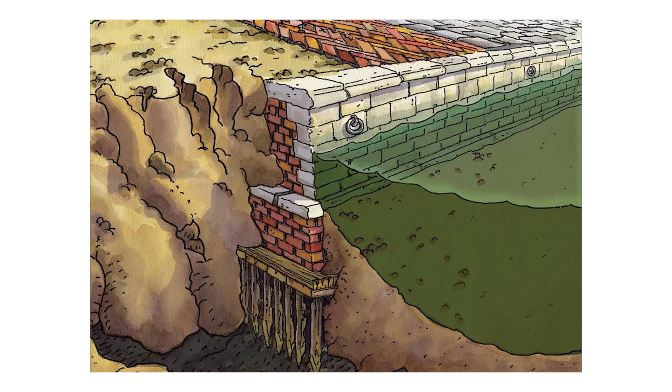How? Simply like that. Piling down piles, creating a sort of dike, and from the dike you will fill it with earth, coming from where you wish—coming from sites where old buildings were demolished, with the rubble filling it up—or earth coming out from the excavation of canals, which was very important in Venice in order to provide good movement of the tidal waters and to make easy the naval and boat circulation in the city.

So this is what you have as a boundary between land and water. And it's very important to have this in order not to allow squatters to illegally occupy the sea, the lagoon water, which was a common property. It belonged to the Republic, to everybody, to all of us.

So it was forbidden. And you know, if you have a working site on the lagoon, here for instance, it would be very easy, every one day or two, to put some mud in it, and slowly expand, looking around if they catch you or not. The laws were very severe: cutting your hands, paying 100 ducats, going to row in the Navy, and things like that. So the temptation was continuous.

But with this line here, which is an embankment, you can see also how much work is required to build the city of Venice. It's not simply that you shovel some earth on the water and that's it. You have to create a precise boundary, solid and strong. And this is the boundary that you see.

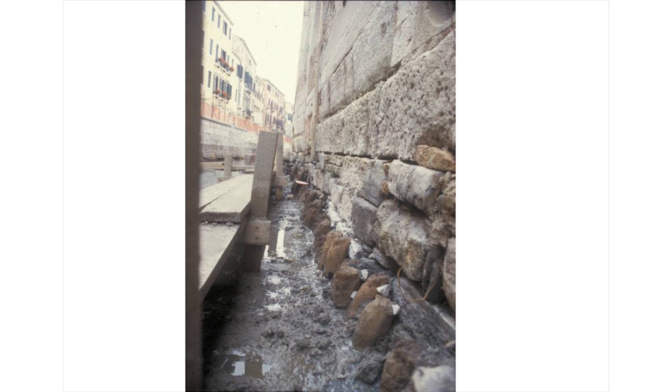Now, if you follow me, it's not a perfect picture, but you can see that this canal in the so-called parallel islands of Venice, in the Cannaregio district, northwest district, going to the railway station today, this canal has been dried up. You have to do it from the very beginning at least once every 10 years, because all the dirt of the city, toilets, dirt, and other things go into the canal. They start filling it, so that the naval circulation will not work properly, and the tidal effect, the cleaning of the city will not work. So in this case, you have to do it.

And if you look here, on your left-hand side, you will see that this is the street line. So you have 2.5, 3 meters of height of this wall. This wall, in that case, lined up with stone, is 2.5, 3 meters high. Twice my height. So you can imagine the amount of work that is needed to do this kind of city.

You see the first line of piles here, and those are the piles to build the land. And then you will have other piles underneath the stone plinth to build the church in this case. So, in other terms, you have a sort of a forest under the city of Venice, but not all over. Only just where it is needed.

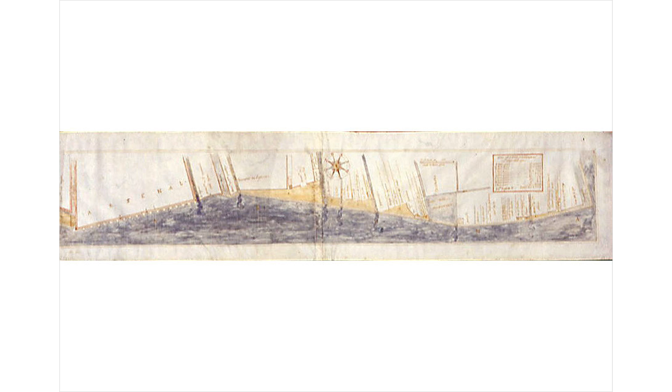So here, after a very long debate, the Republic decided to reclaim the land. And in this drawing, which is the original project, the engineer Domenico Righetti, this drawing is dated 1590, he proposed, and the Republic accepted, to reclaim this land, which is in color yellow.

And this is the last big reclamation of the city of Venice. There were many more in the 16th century, from 1491 to this one, the major one. Then, because of the plague of the late 16th century, the population decayed, the number was smaller, and so there was no more need of big reclamation of land. But I'm very proud of this.

You haven't seen it in the previous one. This is according to trustable sources. You can see how the city has been made. So in red, you have the reclaimed land up to the beginning of the 13th century. This is the shape of Venice at the beginning of the 13th century, color red.

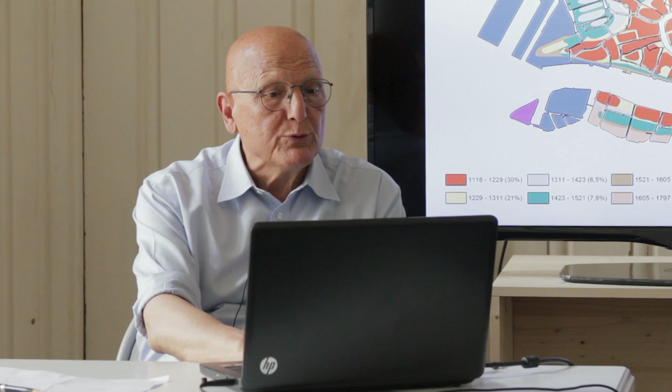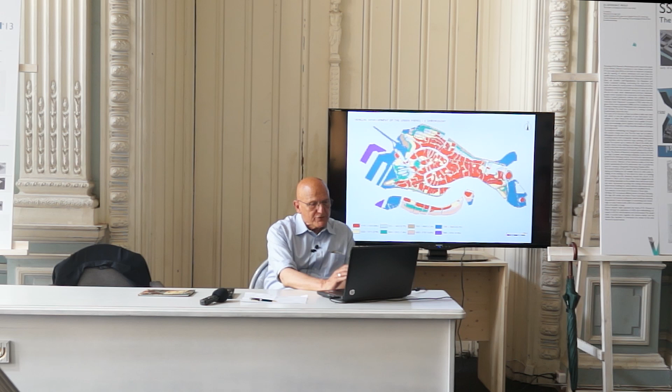And then you have up to the last layers, which were after the Second World War, like the island, which is a very big parking area. This is the harbor, the maritime harbor, and here you have the extension of the arsenal, and here you have a housing project of the early 20th century. So this is the image of the city of Venice, with quantities, with percentages, so you can understand the slow procedure in this kind of thing.

But there is another problem that Venetians had in the city of Venice: it was the water supply. Venice is in water, but has no water. It's written in an ancient chronicle, 1490, by Marin Sanuto. What does it mean? It's like a ship.

The ship is in the water everywhere, but the only drops you have got are in the barrel you brought with you during your navigation. So how can a city with such a vast number of population live without water? This is quite problematic. And there were theories according to which the early inhabitants of the city of Venice were able to get fresh water from the rivers going into the lagoons, up to the year 1100.

The chief engineer of the city of Venice said that the early inhabitants were able to drink and collect fresh water from the rivers when, especially with the low tide, the rivers would come in and bring clean, drinkable water in, before it mixed and became something salty and undrinkable.

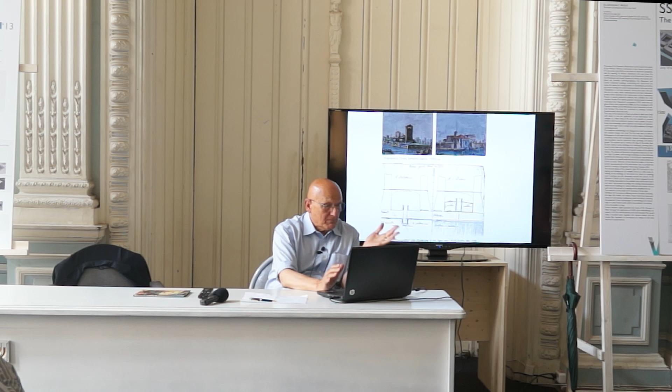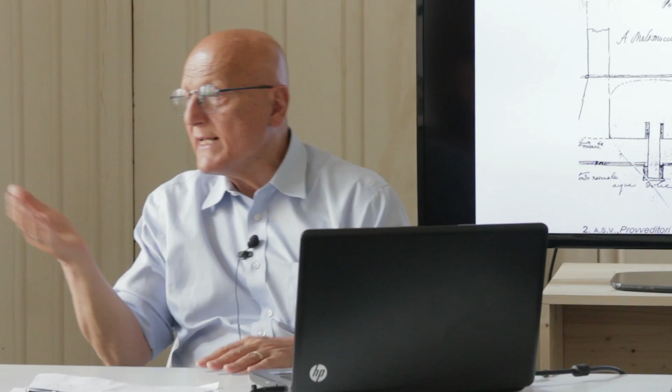Another theory is that it was possible to dig, for instance, in the fort on the Lido, along the Lido, which is the eastern boundary of the city of Venice, protecting the lagoon from the sea. It's a public record by the Republic, where the caretakers of the fortress, in a drawing of the 17th to 18th century, presented the way to collect water at the fortress of Malamocco. It was just digging into the soil, into the earth, and you would get clean water, as we do everywhere, more or less, in the world - an artesian well.

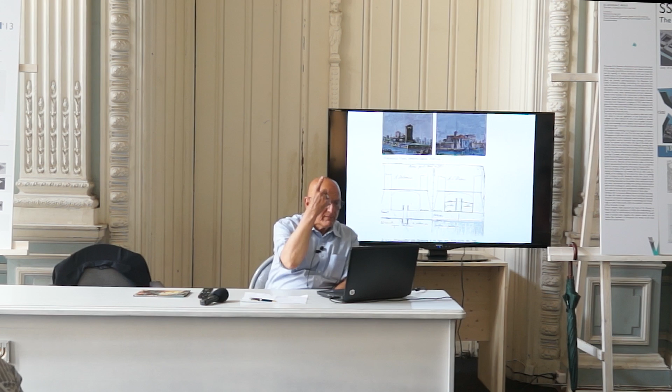Or the other way was to collect water in the other fort, which was opposite to it, St. Peter's Fort, and there you will have what I'm going to explain in a few minutes, the artificial way of getting fresh water from the sky. So those are the two possibilities if we delete the hypothesis of the chief engineer, which is not trustable. One is that you dig and you get water. The second is you cannot dig and you have to collect rainwater.

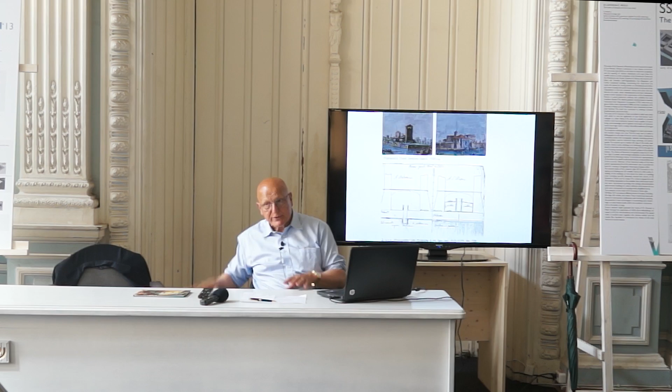There are many, many records in which it's written, across centuries, that you have to be very careful while digging in the Venetian earth, because suddenly, after a certain depth of digging, a springing water, a sort of geyser, will come out of salty water, and it will be very difficult to block it, to stop it, to fill the hole. So the answer to the need for water from the very beginning was to collect rainwater.

And the empty areas of the city, which were the campi, the squares, big or small, or the courtyards, big or small, mainly private, belonging to the wealthy men, to the noblemen of Venetian society, were building this kind of urban tissue, an urban grain, which is peculiar because it's like a sponge.

A sponge has hundreds of holes in it, and the holes collect water. When you put the sponge into the water and press it, it fills up with water. The tissue of Venice is very similar to that. You have to dig many holes all around the city and collect water for your needs.

It's a space-consuming planning, because you have to keep the land unbuilt. There is a fantastic description of the urban structure of Venice, given by Sansovino, the son of the architect, in his book.

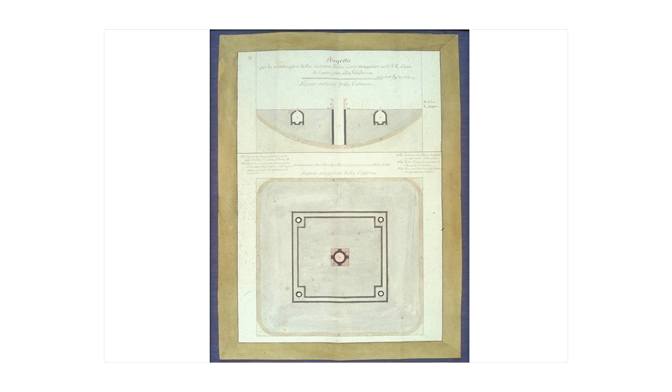This is a more technical drawing, but if you have followed my previous description, I think this is very clear. This is a project by an engineer done in the 20s or 30s of the 19th century, in the jail on the island of Giudecca, and the workers were the convicted people. It means it was quite easy to build one, following certain rules and having an engineer to lead the work.

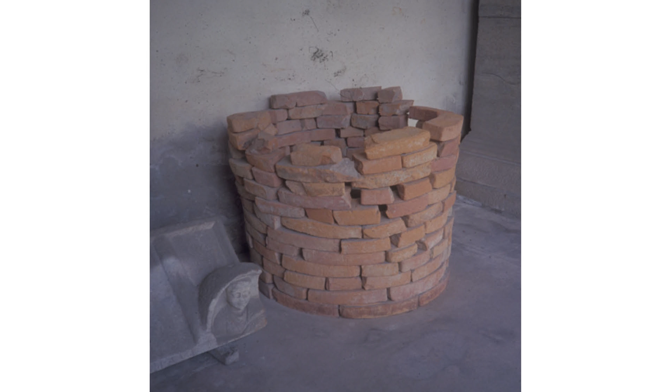So you have the excavation, in darker color you have the clay, the stone, the shaft, the wellhead, the gallery here which makes the tour, and then the sand, with the paving over it. That's the end. This is from the Roman Museum in Altino, not far from Venice, and you can see the bricks which were used, the same kind of bricks, for the shaft - and this is the slab of perforated stone to get the rainwater.

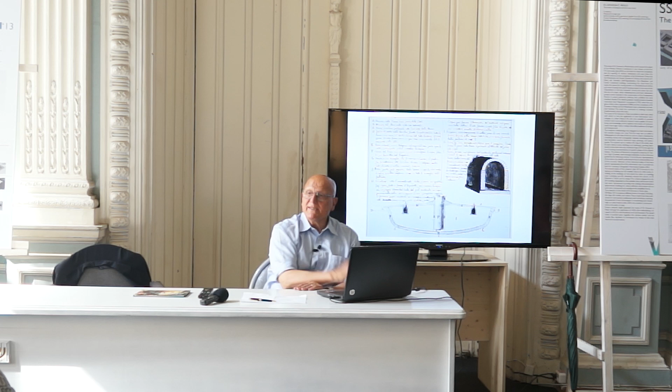Another drawing in a collection of an 18th century English traveler, kept in the Victoria and Albert Museum in London. This is a fantastic description of how a cistern works, and you see the gallery. So everything is clear and very easy to understand.

But in case of flooding, in case of collapse of the clay lining caused by lack of water - especially in wintertime, no rain, frost, ice on the lagoon, no possibility of taking water - because a cistern is also a water container. When you finish your water, you make a phone call, and a guy comes with an enormous barge filled with water, and they fill your cistern. So it's both ways, artificial and natural.

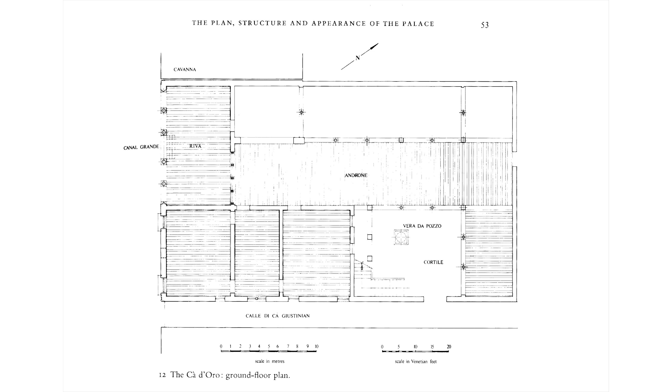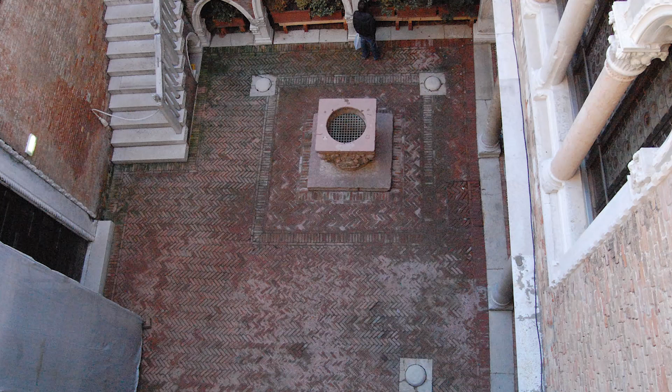So at the Cà d'Oro, the House of Gold, 1421-23, you see that about 1/6 of the land is lost for the courtyard, which contains a cistern. This has been renovated. The provision of water to the cistern came from the capital on the corner of the gutter, which is very well carved. In this cylindrical structure, you have clay pipes, baked clay, glazed, that take the water down to the cistern.

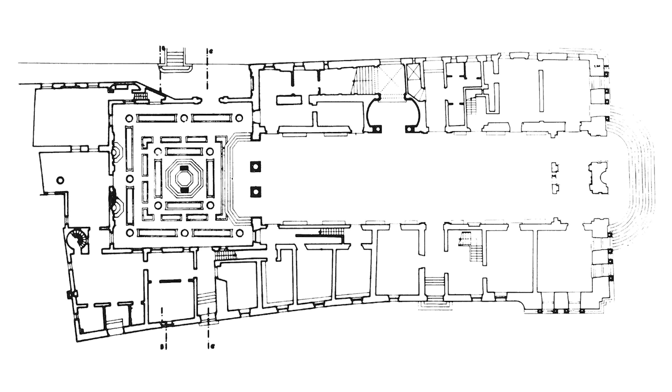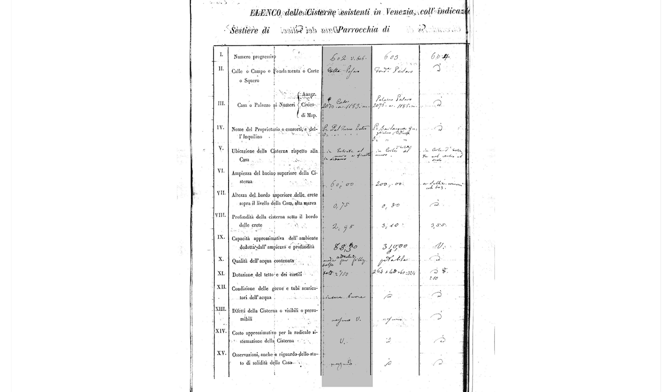88.3 cubic meters per year of water, which is a reasonable amount if you consider an estimation of a colleague of mine, a historian, who said that the average quantity per person in Venice in the 16th century was 5.5 to 6 liters per person. Of course, the noblemen will have much more, and the poor people will have less, but anyhow, this is the average quantity.

So forget showers, forget the tub open while you're washing your teeth, and so forth. We cannot make comparisons with this, because it's another society, another way. But it was considered enough.

But after a few years, his cistern didn't work anymore. It was filled by very big black flies, there was a horrible smell coming out from there. And of course, because of the height of St. Mark's Square, which is a very low, ancient area, the salty water got inside, and so it was ruined, and after really a few years it was out of use.

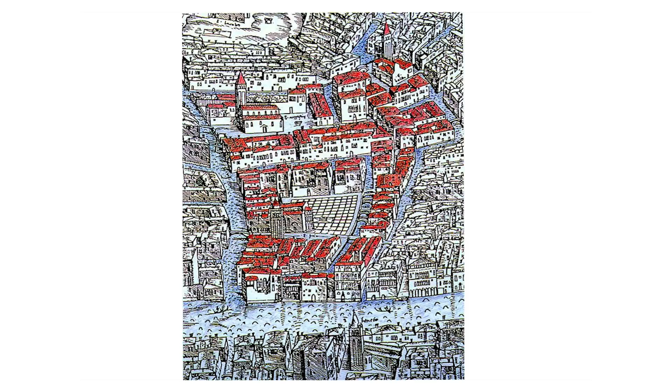Every single, small or big courtyard, there is a wellhead in the middle, because we need a cistern. So this is the urban tissue. You see that this spongy tissue has a very big hole here where you have a cistern, San Polo, where the dimensions of the water supply area is 1,100 meters. So you have a very big quantity because you have many people.

But if you look carefully on the roofs, which I colored, it comes out that it's really a spongy tissue. Those white areas are the courtyards inside those court houses. So easily we can find a cistern, a cistern which is private, of course, mainly private. The blue one is public. This one, in the Campo, is public, but others are private, and they are in a courtyard.

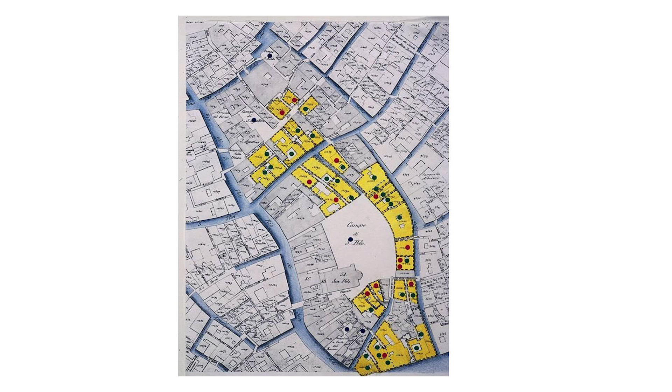But we can see that we also have red spots, red dots. What does it mean? Of course, being the land so expensive, they had to invent something. And what they invented is a way to collect water without losing a single square meter of land. So the concept of the courtyard was brought up to the roof. The roof became the provider of water for every building, especially speculative tenements like those.

This is the year 1547, the Cappello family, an important Doge family, and this is not a palace, this is a tenement which works like that. From the colors you can understand it quite well. This is the ground floor, here, which is divided into 4 colors, so you have to find out your own door.

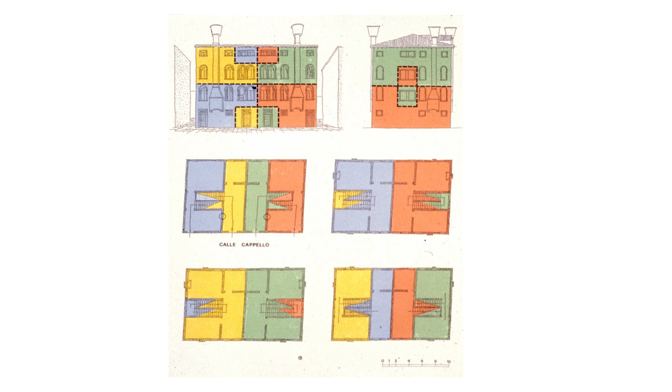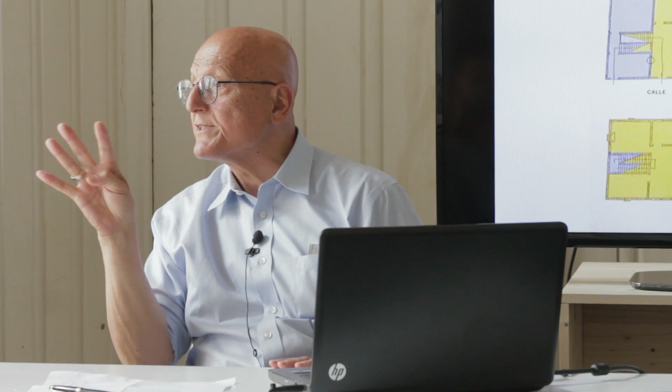Then you have the first noble floor, le bel étage, première, and the second noble floor, and then the top floor, which is a mezzanine with reduced height, also divided into 4 colors, so that each house has 1/4, more or less, at the ground floor, half of each bel étage, and 1/4 at the top mezzanine.

This is a revolution in Venetian housing because it provides independent doors, and with the invention of the double stairs that you may remember from Palladio or Sansovino - if you go to a department store, the escalators are double stairs, one runs in one direction, the other in the opposite, and they change direction on the top floor, so that each house has its own privacy.

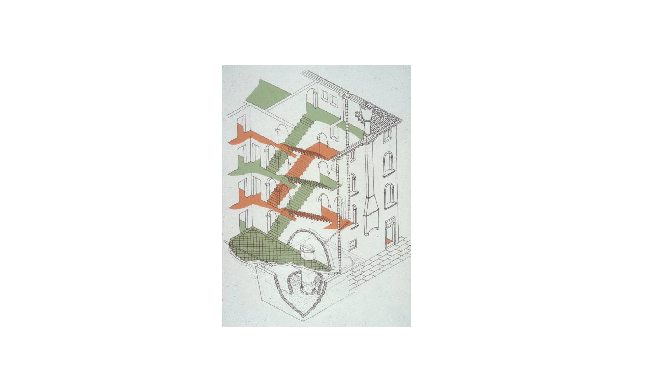But what matters in this case are the staircases, Leonardesque or double stairs, and the private water supply, which was built utilizing pipes inside the walls, taking down water from the roof, 1548, 1550.

Castelforte San Rocco, it looks like a palace. It isn't a palace. Those are 4 houses. I call them double houses because each bay, each sector, from the symmetry axis, which is here in the middle - on the left or right-hand side, you will have 2 houses mixing up together on every floor.

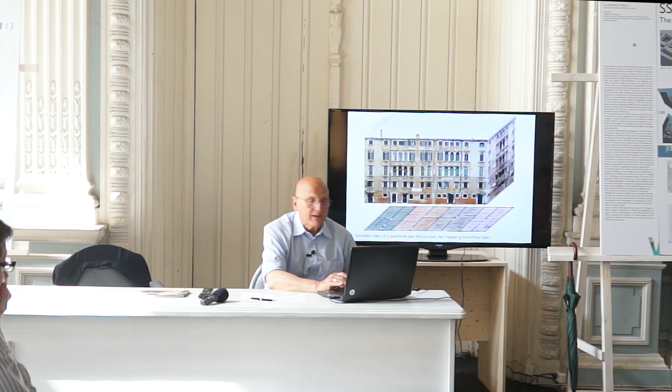In this case, you have even 2 mezzanines, the first mezzanine and the top mezzanine. This is the same, and you can see the direction of the water in the gutter, which goes down - you can see those rings, which are the wells, the wellheads inside the houses. Here they are.

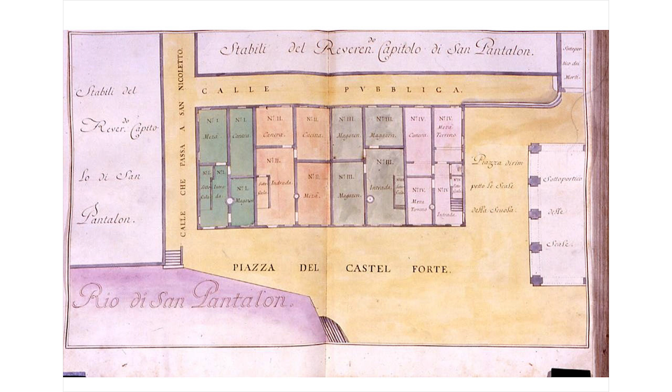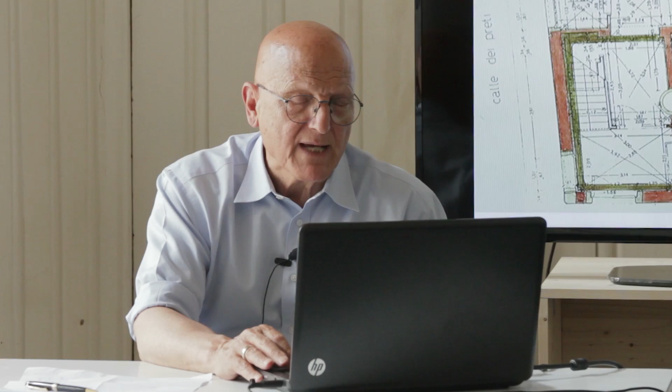So those are the dimensions of the cisterns according to the survey of the city engineer, Engineer Bianco, and those are in cross-section.

Now, this is an important step to understand. You can see the courage of the architect who invented it. And the first one, from what we have learned, is Antonio Abbondi, called Lo Scarpagnino, who presented the double building to the school of San Rocco in the year 1533, telling that the cisterns would be dug through the plinth, the foundation plinth. And this is very courageous because you know what happened.

Do you remember what happened to Sansovino when he was building his library in St. Mark's Square? He utilized a Roman vault and the vault collapsed and he went to jail.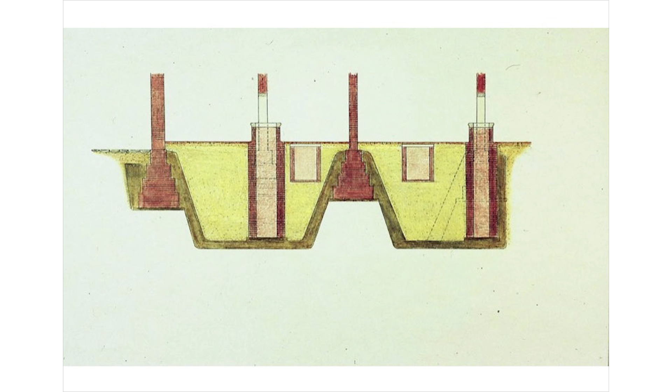So you can see that those are the foundations.

Now, this is the wellhead of the Castelforte San Rocco, one of the 4, and it's divided into 2 because one is in the entrance, water for the house, and the other half is in a nearby room, which in the records we found in the archives - Paulina found them - is called the laundry. So they were utilizing the water also for washing.

And every kind of tenement of this double housing, rich or middle class, had their own water supply. Here you have the same, 1556 or 1609.

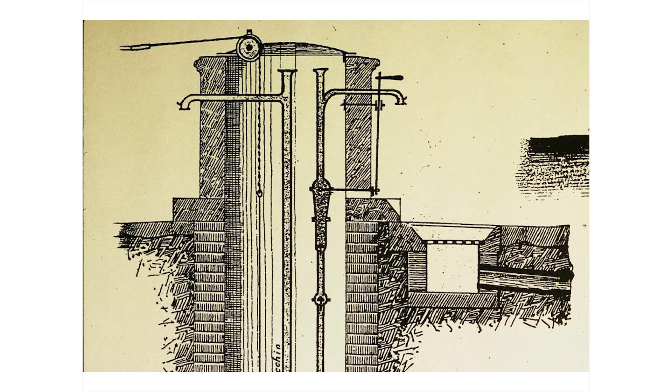Then it happened that the aqueduct arrived in the year 1884, and it caused the death of the water supply system by filtering cistern. This is the flower bunch for the funeral of the cistern in the Ca' Foscari University. You see a tree, a wisteria, growing nearby the wellhead, meaning the wellhead is no longer in use.

What we decided - you didn't ask me how many of those cisterns were in Venice - 7,000. 11% of the area of the city, built or unbuilt, was providing water to the cisterns, 11%. So you can imagine the extremely powerful links between the urban tissue and the water supply.

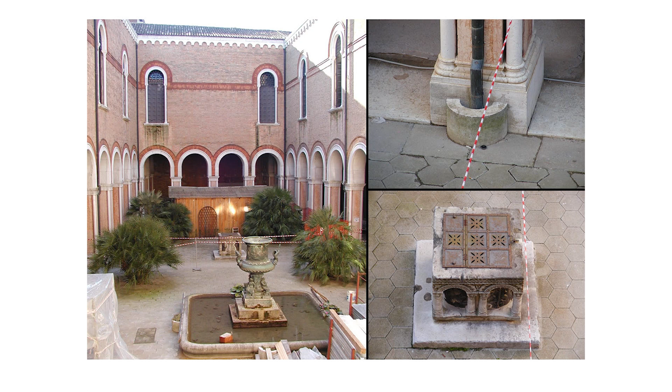So I said, it's very stupid to use water in the Museum of Natural History for the WCs. There are 20,000 students visiting here, and every time they go to the toilet, they flush the water and use good drinkable water. Why should we use it if we have 7,000 cisterns?

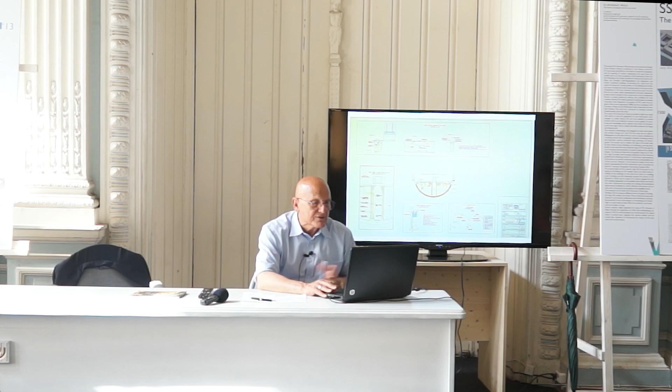So I made a project utilizing the water, which was not successful because there was no more money, because of the Moses - the Moses is the barriers project. All the money for the maintenance of the city went into protection against the high tides, so no money for that.

But I'm very happy to tell you that in the Marciano Library, with a colleague who was heading the restoration of the reading hall, he asked me my help, and together we organized the collection of this cistern, designed and built by Jacopo Sansovino, which now provides water for the new toilets.

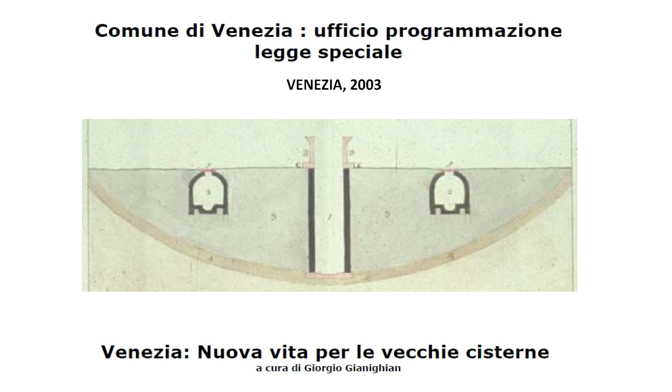No more use of good water for toilets, but water collected by the roofs. This is the project I did in 2003, presenting new life for the old cisterns in Venice. You can find it on the web.

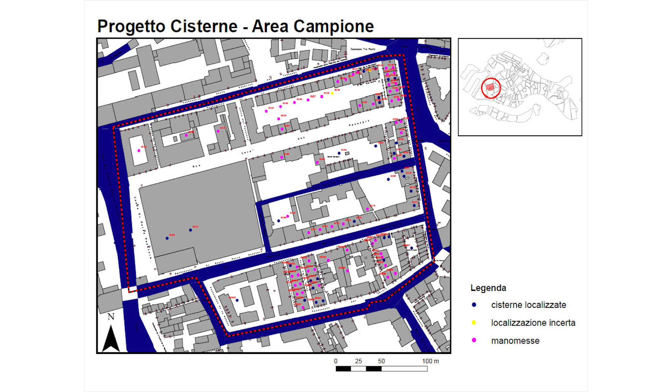We created a GIS, and this is not the pest of Venice - this is the number of cisterns, which is quite amazing, isn't it? And everyone is linked with the database.

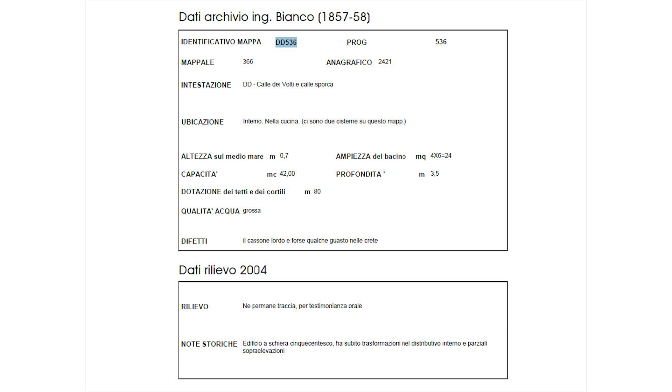For instance, that one comes out with the file with a survey of the city engineer, which says the depth is 3.5 meters. The dimensions of the collecting area is 24 square meters, where you have the clay, and then the capacity is 42 cubic meters per year.

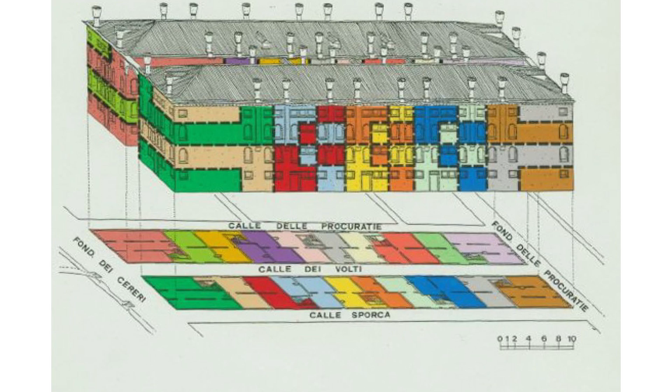So we went there - I got a phone call. This is the building. There are 10 and 10 houses, Venetian double houses, one in the other, built by Jacopo Sansovino, very possibly, in 1555. In each one, that's the file, the original file of 1858 by the city engineer.

My friend called me and said, I am restoring the ground floor, come and see the cistern. I ran there, and eventually it was free from the paving, and you can see the sand, you can see the box, which is the first filtering.

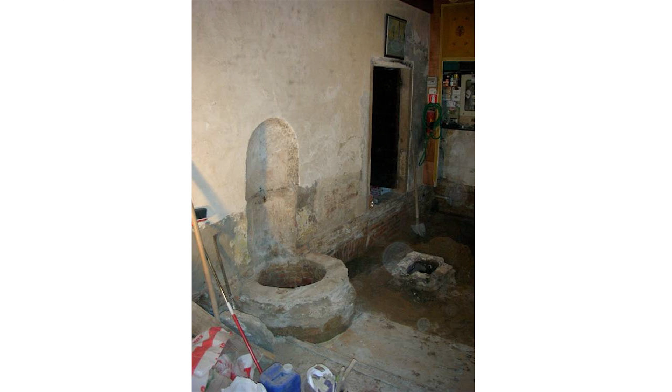Do you remember the gallery? When the cistern is small, you don't build a gallery, you build just a box, so that the rainwater comes in, gets filtered, and then goes to the sand.

We were able to survey it, and we were able to see the foundation plinth, the upper level wall, upper level of the foundation plinth visible, and then the clay. This bluish, greenish, gray color here is the clay. Everything fits, which is important for us.

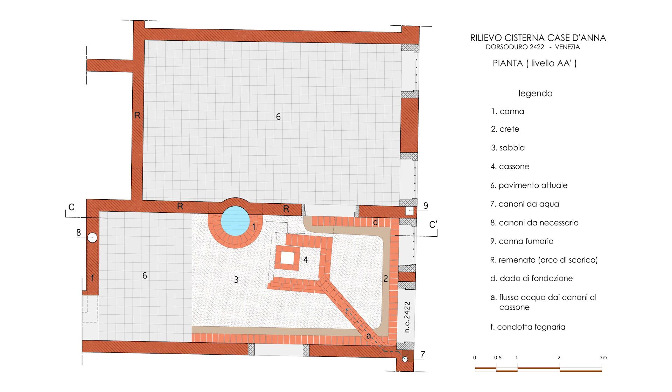So we did a survey. This is the water, that's the wellhead - no wellhead, the shaft, the wellhead disappeared. Here is the rainwater coming down from the roof with the pipes. Here is the little canal, and this goes to the box.

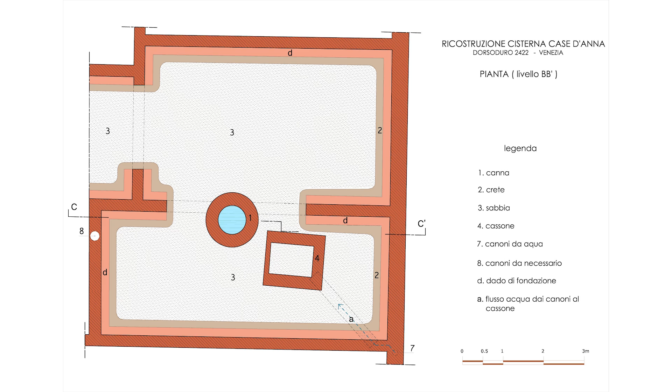We were able to verify the mistake in the survey of the city engineer. He said the 18 or 24 square meters were those, which is not true. Because here, on one side and on the other side of the shaft, and even here, there are 3 relieving arches. The sand continues in this room, number 3, and in this room as well. So the dimension of the filter is at least 3 times more than what is described.

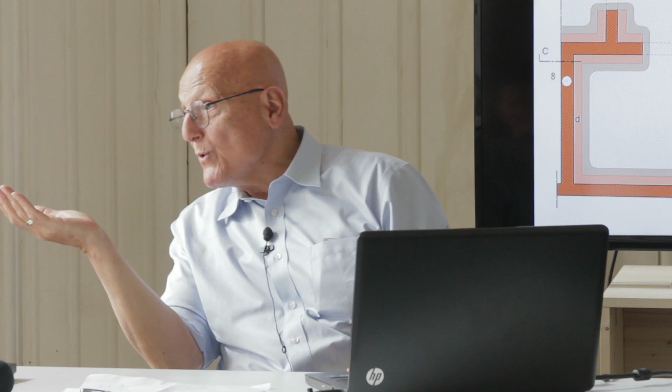So if we do a restoration of that, we will have a lot of water. Instead of 40 or 50 liters, we'll have 3 times more, which will create really a convenient point. This is a cross section, and those are the relieving arches - letter R, that you can see.

So that it continues. Well, at 5 o'clock we'll end - only one thing remained undiscovered in our research on the water of Venice, and it's the origin of the Venetian system. Who invented it? Nobody knows. There are no records.

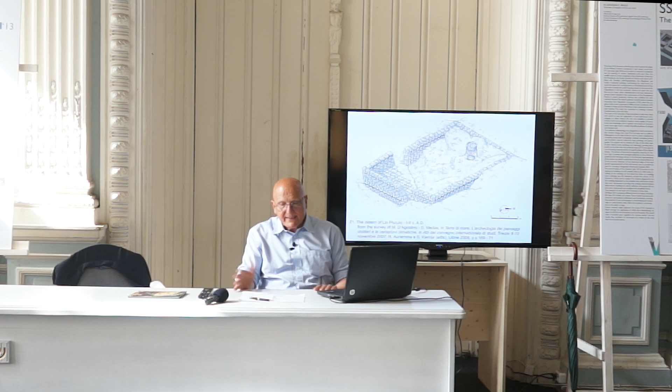We know that the first cistern surveyed by the city engineer is in the 11th century - 1015, that's the first one. But we don't know anything about that.

I had the suspicion that being Venice Roman land and being Venice in Italy or in the Mediterranean, the inventors must be the Romans. And actually, by chance, talking and reading, I asked this to very distinguished archaeologists in Cambridge last year, the professor of classic archaeology, Graeme Barker.

I asked the most distinguished Italian professors of archaeology: have you discovered such a cistern in your excavations? No, we have empty chamber cisterns dug into the rock or built outside, as in Libya, but not the filtering system. But eventually, to make a long story short, it came out that...

Dr. Medas and D'Agostino, two submarine underwater archaeologists, they found it at 6 meters under the water in the Venetian lagoon, 5 or 6 kilometers from St. Mark's Square. It is there, with a difference.

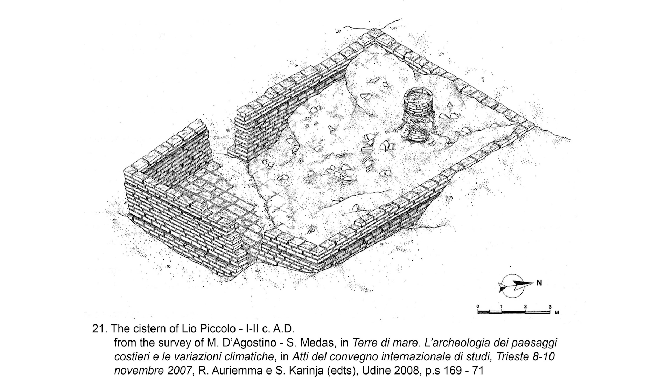The difference is that this box, which is filled by sand, as you see, which has the shaft here, is 2.20 meters high. The 4 sides are built out of sesquipedali, the Roman big bricks. So also the upper part was covered, but it was not under the soil, it was over the soil.

It was on an embankment, on a dock, so that the Roman ships arriving in the 1st and 2nd century, docking there, would get their fresh water supply. They put them in barrels, I presume, and they would start traveling, or continue traveling, having a fresh water supply.

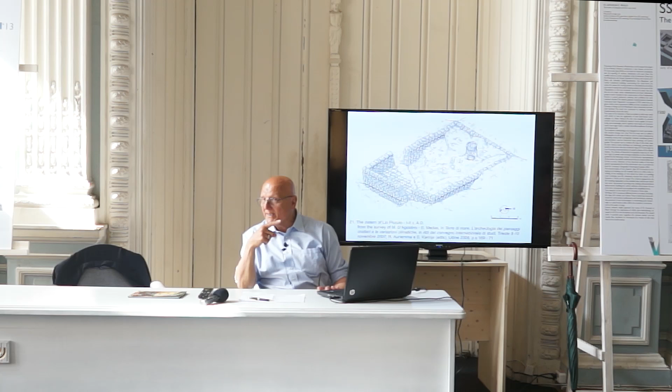The intelligence of the Venetians is double. The first intelligence is to remember the Roman way of collecting water. The second is to press it 3.5 meters under the soil. Thank you very much for your patience, and that's it.